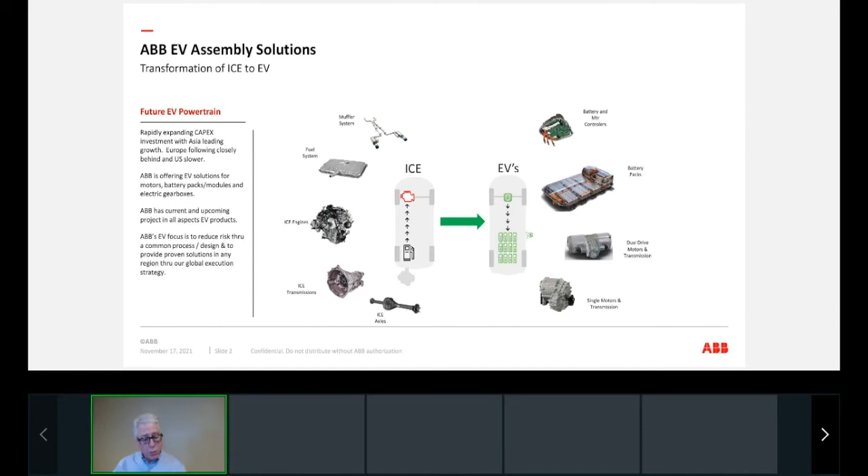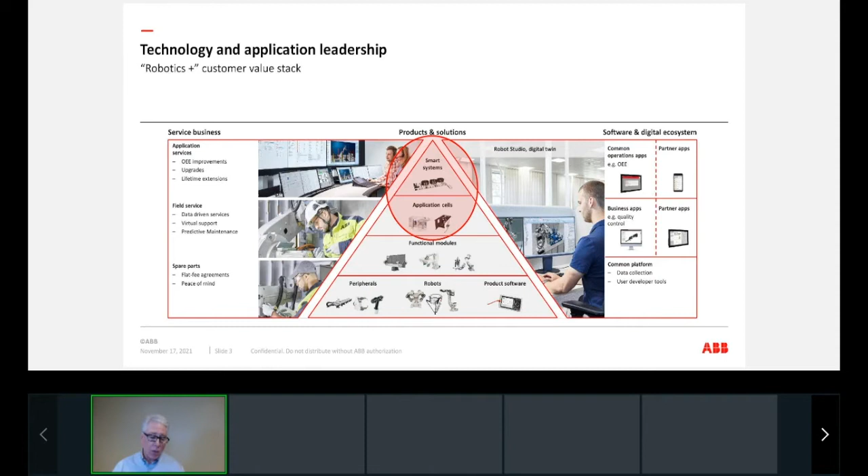If we step back and look at EVs, and what's the real basic building blocks of EVs, okay? So you have batteries, which are made up of a number of things, and you have drive units or electric motors and transmissions. Those are the two principal building blocks of an EV, or the major differences there. Now, there's other things out there for sure that are different, but these are the driving underlying differences.

So if we take batteries, typically at the very basic level, you have cells. They could be a cylindrical cell, a pouch type of cell, or a prismatic cell. Those are just the different cells that would go into building that battery. As we move to the left a little bit, you have the modules. They are typically built up of cells. They can be somewhere 15 to 25 or 30 prismatic cells, or as many as 600, 700, 1100 cylindrical cells or pouches, depending on the range, depending on the customer's configuration.

So the modules are really there to take the cells, put them in a package in a little bigger format, and then they would go into what we call module to pack, which is typically how it's been done to this point, where you really take those modules and start to place them together and really build the pack, the battery per se, for the electric vehicle. Sometimes those battery packs are in the configuration of the vehicle or what would fit in the vehicle. Some are single level, some are dual tiered. There are a whole myriad of different arrangements on how that battery pack looks.

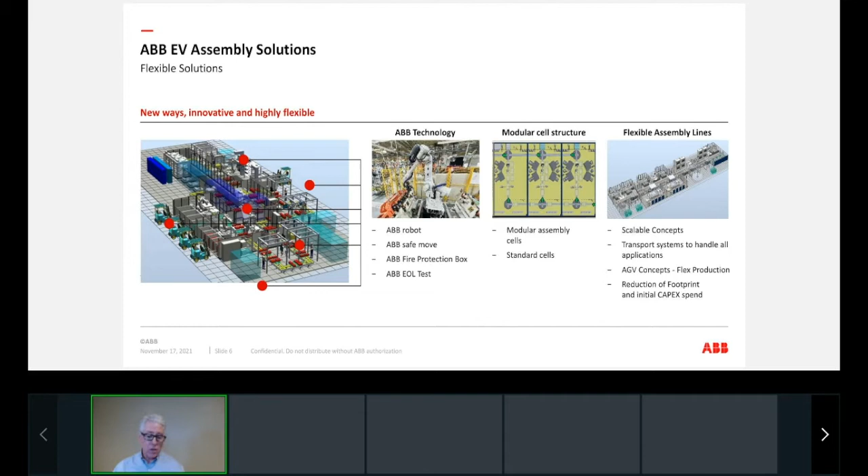We arrange them in a flexible assembly line that really can be scalable. It can use an AGV-based transport system. It can be conveyor-based, it can be robot-based, but they're standard flexible modular cells that are basically standalone entities that can really function together with those transport systems. So this is that highly flexible solution that we at ABB have really started to put into our systems.

If we expound on it a little bit, here's a typical battery assembly line. So what this system does is we take the input from the customer, we look at their product, we look at the requirements of their product, we then look at the volumes that they want to do, we look at the testing that needs to be done. And while every battery is pretty close, there are some minute differences between them. And what we do then is we say, okay, this would be the basic backbone or the framework of the system. And we would do it AGV based or conveyor based. But we build that.

And then what we do is we look at the left, we take standard stations. You'll see like a flow drill station for putting the covers on. You'll see a manual load station for wiring. And maybe you have 4 or 5 of those and you put those either in what we call parallel, which basically they're completely parallel, one next to the other, or they can be in series if it's required, or they can be what we call stitch parallel, which is basically you pass one through to the other. And we do that same thing on the rest of the modules that really build up this system.

So that's the key to building a flexible cellular-based modular assembly system. It's really taking those individual pieces and putting them together and connecting them with an AGV or conveyor-based transport system. And what really then drives that is its ability to scale up and down. And we'll talk more about that through some of the solutions that you'll see here in a few minutes.

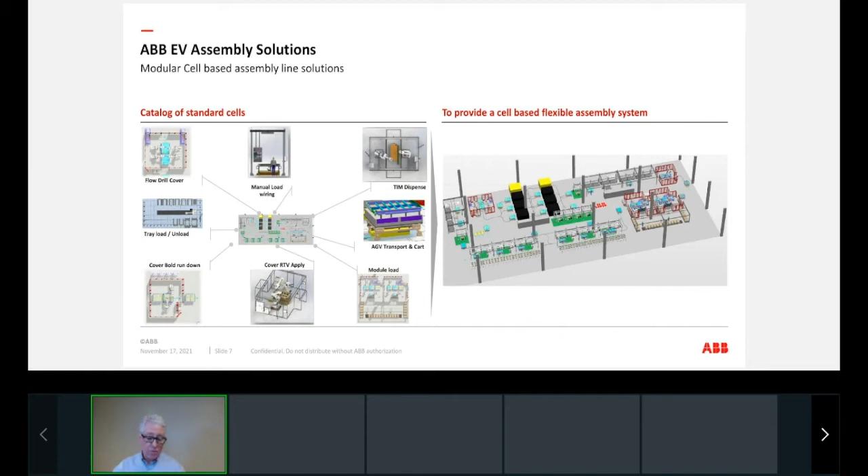So if we go back to that basic building blocks of what an EV is, what I wanted to do is share with you in each one of these areas what ABB is doing, and in some cases what we're not doing and why we're not doing it.

So if we take the battery and we look at the cell, you'll see the cell is typically high volume, meaning you're going to run 5, 10, maybe even more per second, depending on what they are to build the volumes of the future EVs, okay? If you imagine this, if you have 1,100 of these cylindrical cells in each module, and there's 12 modules in each vehicle, you can just imagine the amount of scale that you've got to do.

Also in the cells, we see some technology: the winding, the coating, the slitting, the whole electrolyte, the forming, charging, discharging of the cells. Those are all really traditional battery, even the old school cells that we use in our mice and anything that we use. Those are technologies that were born out of that industry, and there's people in that industry who know those particular equipment very well.

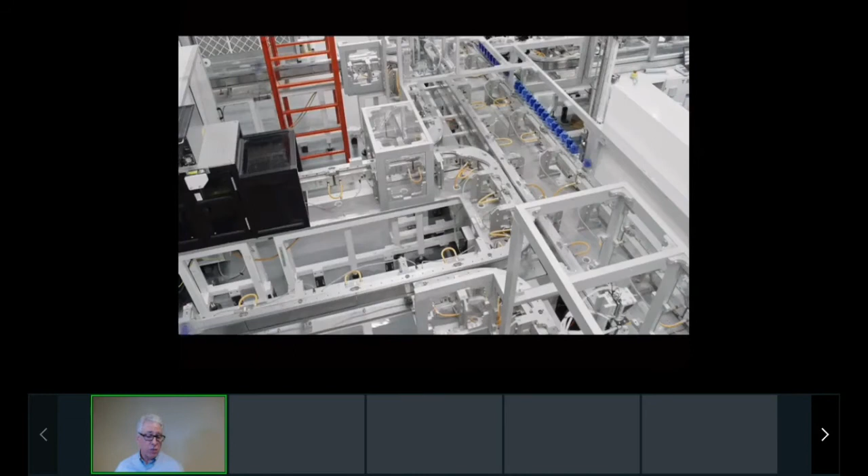I wanted to share with you a little video of that track. So here you see a battery cell moving through an ACOPOStrak configuration and assembly system. You'll see that this is very high speed. You can marry them all up. You can put small trains together. You can then break them apart. It's very, very flexible. And most important, it's high speed. That's the key in the cell manufacturing of EVs, high speed in the cell.

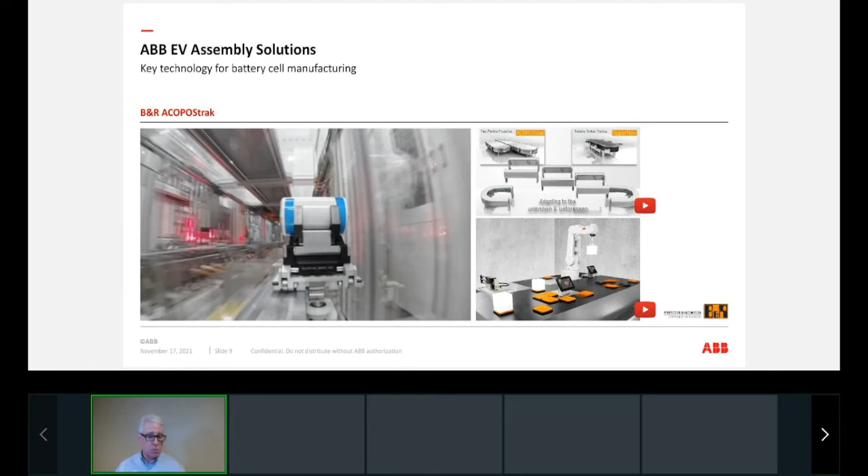So what is it we would do with that? Here's a solution based on the ACOPOStrak. It's using the ACOPOStrak to take cells that came out of formation. Formation is a process that each of the cells have to go through after they're put together and charged with an electrolyte. They go into massive storage facilities, typically temperature controlled and fireproofed, and stay in that storage sometimes more than 20 days, sometimes less. They get charged, discharged, and you're really forming that cell.

But the cells don't always form the same, okay? Some are better than others. What this system does is allow you to separate those cells. We know the grading that came out of formation because they've tracked that and they've given us a tray. We pick all those individual cells out of those trays by their grades, and then we use the ACOPOStrak to separate those and marry them up in smaller trays.

So now we can start to handle 10 or 12 of them simultaneously, and then move them onto the pack out cells at the very back. This could go from a cell manufacturer within a facility over to a module or cell to pack line, or it could be in a different facility and then be transported to various other automotives.

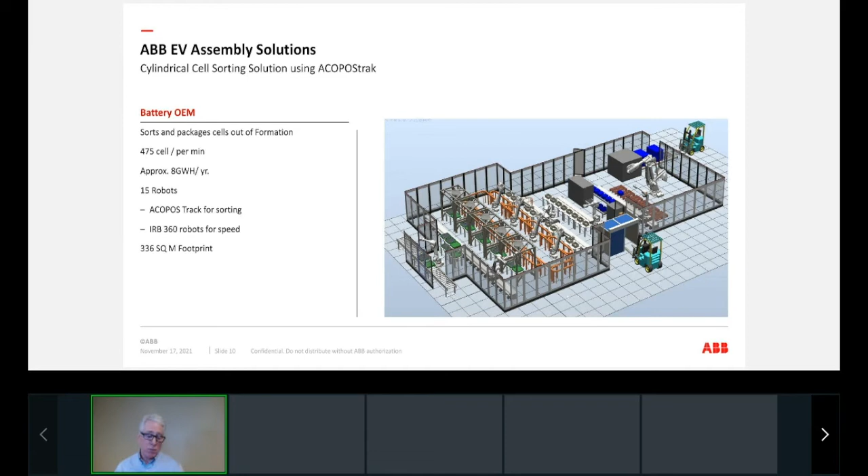If we move further now, we get into the modules, and modules are becoming more and more important. We're seeing a lot of our customers are very, very interested in cell to pack. And as you can imagine, if you're going to go from cells into modules, the same process has to go from cells into cell to pack. So the welding, the stacking, the thermal paste between the cells, they're all going to be similar. And that's why we're seeing a lot of renewed interest in how you build modules, not just receiving them from a battery manufacturer and then configuring them in the pack.

So as we jump into the module build a little bit, I wanted to show you what they consist of. What we're going to show you here is one particular prismatic battery. This is a module. It's for trains. And what you'll see is the modules here are stacked in certain orders. There's dividers, there's different separators between them. Sometimes there's computer boards for battery management that are placed into modules.

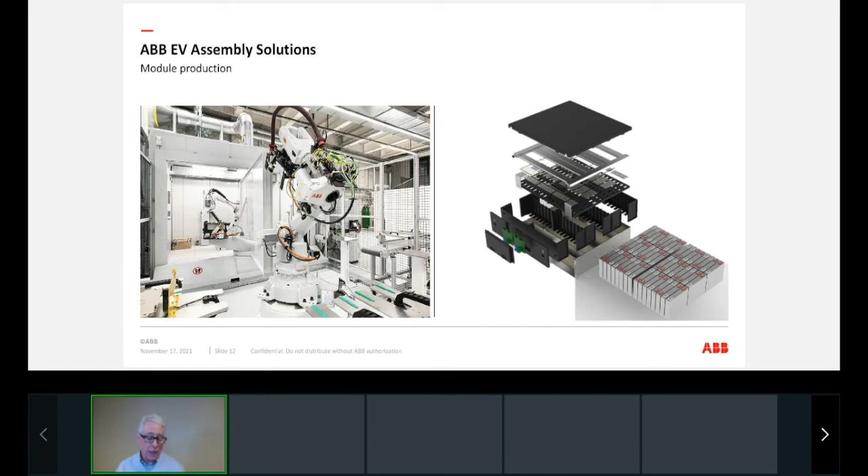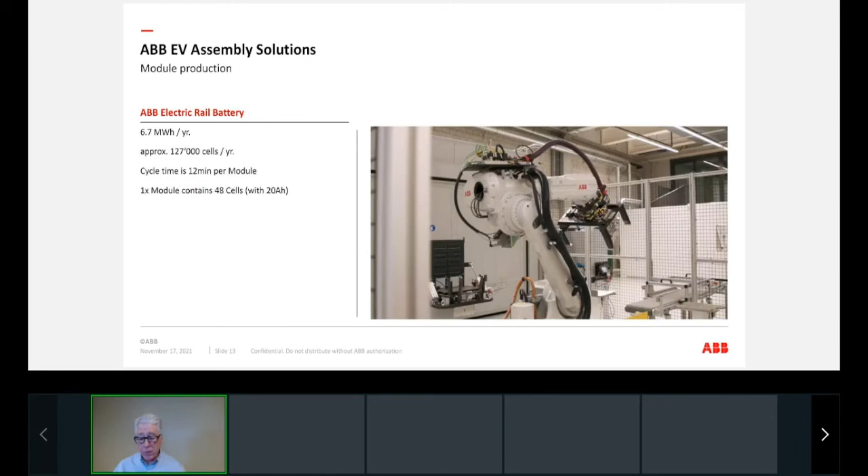But the largest single thing in most module production is the welding of the tabs. How do you connect the anodes and cathodes? That is principally the largest CapEx spend and usually the most machinery in each of the module assemblies. So what I wanted to share with you in this next video is what a typical module to pack would look like.

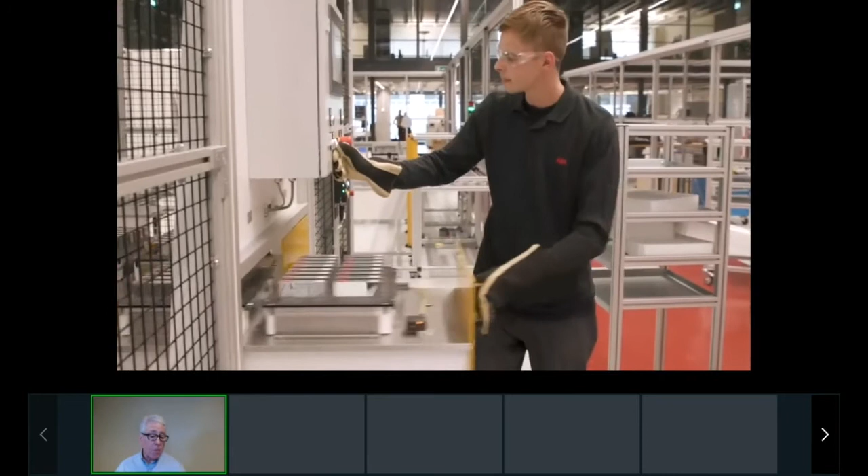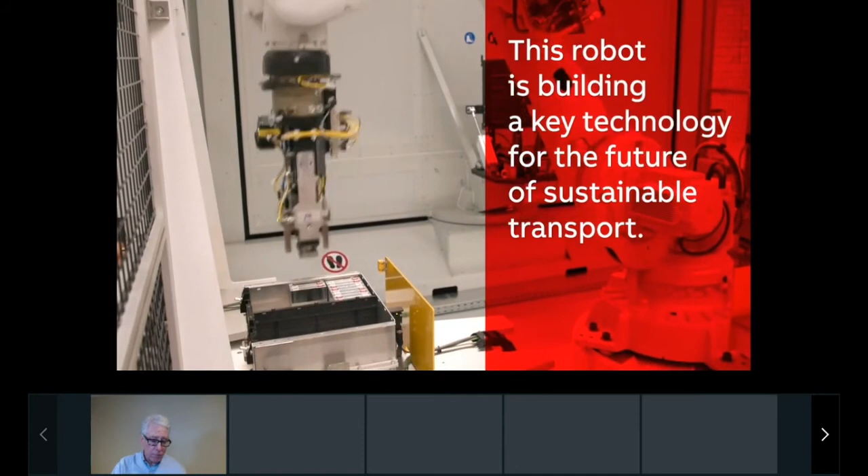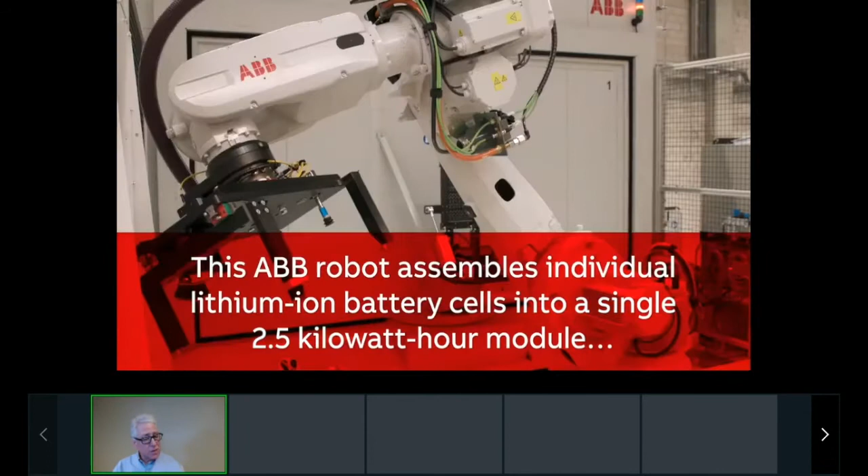So here, what you'll see is a typical cell. You'll see the modules coming in here. They're just in containers. So we pick them out with a robot. We then load them into a configuration. You can have multiple configurations. I think this particular cell has 3 or 4. And you'll see the red and the green or white tabs that are on the top. That's to get lined up for the bus bar connection when we weld.

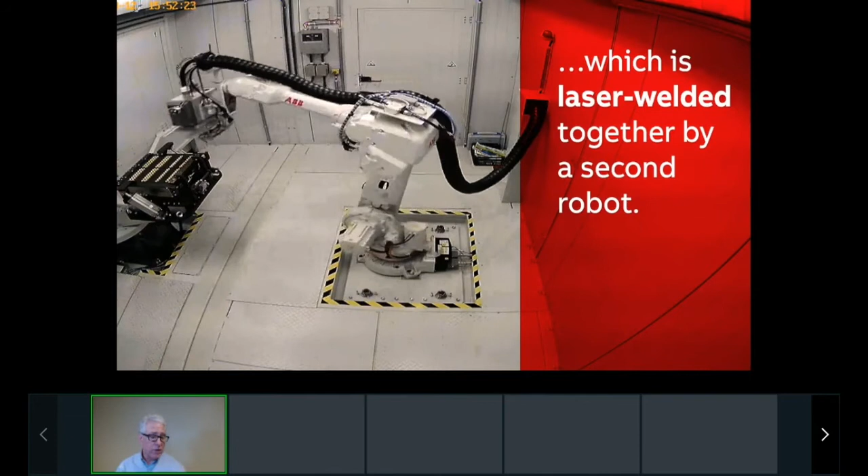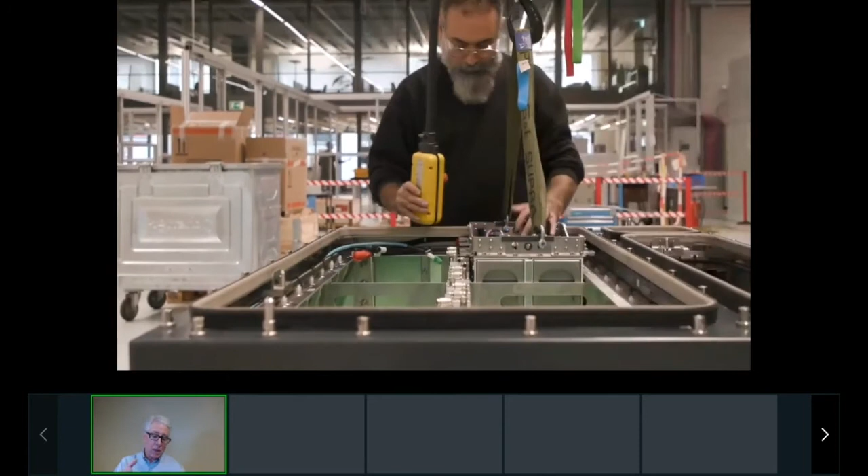We then load it to a traditional turntable, arc welding, laser welding style package that we have produced. That's one of our standard cells that our systems have built. And then after it's completely welded together, we then, in this case, manually build it into a battery pack. That's typically the whole pack building or module building process. This is a very limited piece of it, but it gives you a good insight into what module build is about.

As we move forward, I wanted to get into the pack build. And this is where a lot of our customers are focused right now. This really gives you the configuration of the vehicle. It sometimes is the whole floor of the vehicle. We're not going to talk cell to pack today, but you can imagine that cell to pack would basically be combining those things that we just saw into this same process.

So what you'd see is a much, much larger scale of equipment. You'd see a lot more of the welding. You'll see a lot more handling of the cells that would come in instead of just picking modules and placing them. So what I wanted to do next is talk about the major pieces in these battery packs. I get asked this a lot. What is a battery pack and what does it look like?

Well, battery packs are typically made up of trays, an aluminum or a steel base, that's been precisely machined and/or cast. And then you have a cooling plate, either integral or a cooling plate that is added in and bolted down. That cooling plate is meant to take the heat away from the module, or in a cell to pack, the cells.

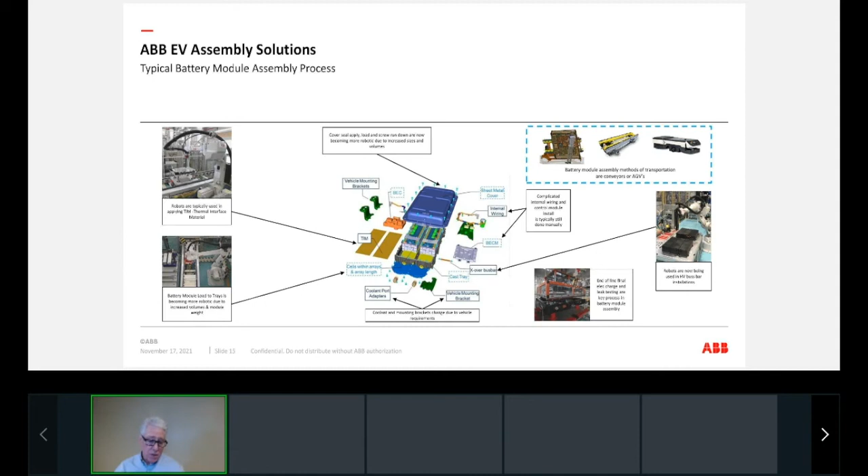And then far and away, the biggest piece of it is the charge discharge, really the end of line cycler testing, to bring that battery into its full charge. It's about 80% charge when it leaves typical assembly lines. So you charge it up and discharge it to make sure the battery is working well. And at that time, it's ready to go to vehicle assembly and be put in the vehicle. So these are the typical steps in a battery.

I want to take you now through a battery system that is modular. It's highly robust. It's got a lot of robots in it. It runs about 44,000 units a year. There are, I think, 8 robots in the system, and it's very much a typical battery assembly system. So as I bring on the video of this system, I would like to talk through that a little bit.

So what this system does is you see these 2 hi-lows down in the very center, very bottom of the picture. Those hi-lows are taking finished batteries out on the right-hand side, and they're putting battery trays in on the right-hand side. And we have one robot on a track loading these new battery trays onto the AGV e-cart, and then we have that same unit pulling finished batteries off, putting them in dunnage to leave the system. So as we continue to follow this line around and we go down to the cell on the very bottom right, that is module load.

You'll see the 2 high-lows that are bringing in product into the very left-hand side of the screen there. They're bringing in modules. Those are modules where you're picking those modules all out of those dunnage. There's 2 robots on track. It's using 3D compliant grippers to go in and pick those modules up. And what they do is then they pass those off to handoff tables.

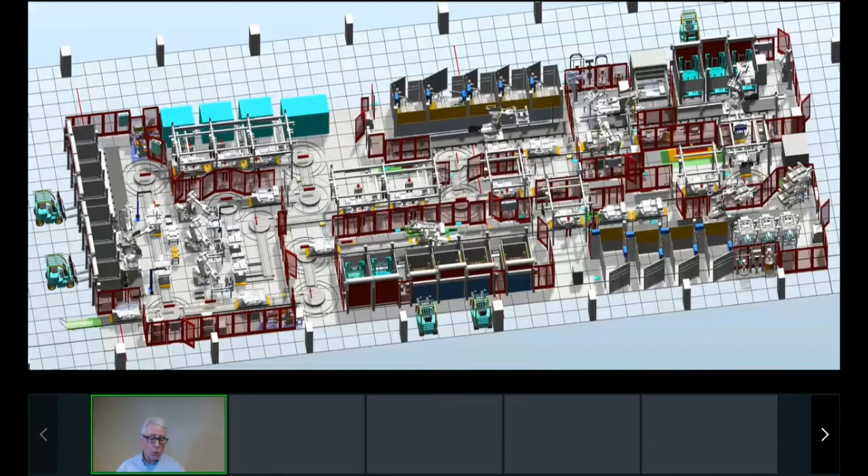This is where we hook the interconnection. So this is actually the cover where all the connections of the battery to the motor, the battery to the rest of the subsystems of the vehicle, that's where that bulkhead connector gets put on. It then comes to one of the final stations, which is basically the final end of line test. But before we do end of line, because this is a glue-on cover and it's not a gasket, we actually have to let that glue sit for a bit.

Okay, it's got to sit for time, or if we charged it with air and tried to find a leak, we'd just be blowing the seal out or making it worse. So what you have is a baker's racks where we hold those, and a robot basically keeps those filled. And when it's in there for the set amount of time, it comes into these end of line testers where we go in, hook the battery up, charge it, discharge it, verify it, do all of the cycle testing on it.

And then it leaves and comes to the pack out area where we actually then put it in dunnage and it's ready to go to the automotive final trim and assembly building. So this is a very, very typical battery assembly line that we have built.

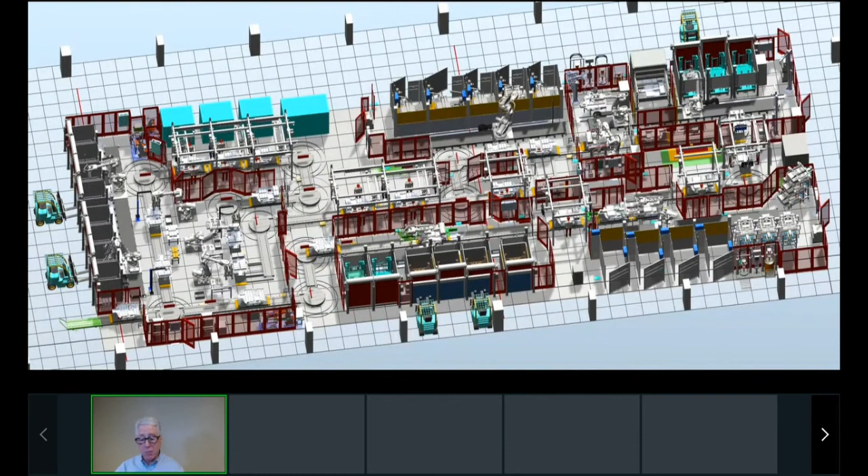As I move forward, I want to get into battery control modules. Battery control modules are really important. They basically give the drive unit its controls, how to act, how to do the regen, all those pieces of that. And what you'll see here is a typical battery control module.

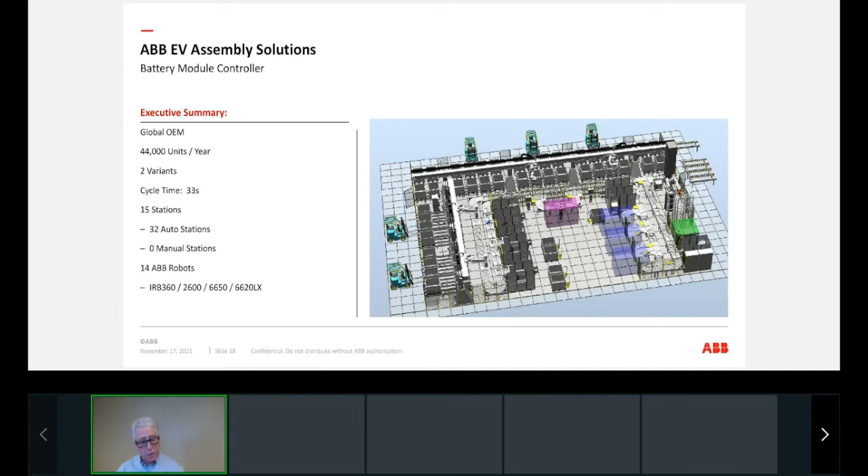Again, a lot of use of the IRB 360s and a lot of loading of product in. These cells have a lot of product that comes into them, and we use the flex picker and then traditional assembly processes to put these battery control modules together.

So what I'd like to show you here is a standard cell we built. You'll see the IRB flex picker. He's loading parts out of trays, putting them onto a pallet, which contains the part, and then it moves down to the next station, which is a robot that would either do more work on it or it could be doing the fasteners.

So these are kind of standard building block segments that you could put together. If you have a lot of these, you can put 4 or 5 of these together, have different incoming product, and then around a conveyor system or an AGV system, you can use this as a building block. What I'd like to show you real quick is a quick video of what those look like. And that is right here.

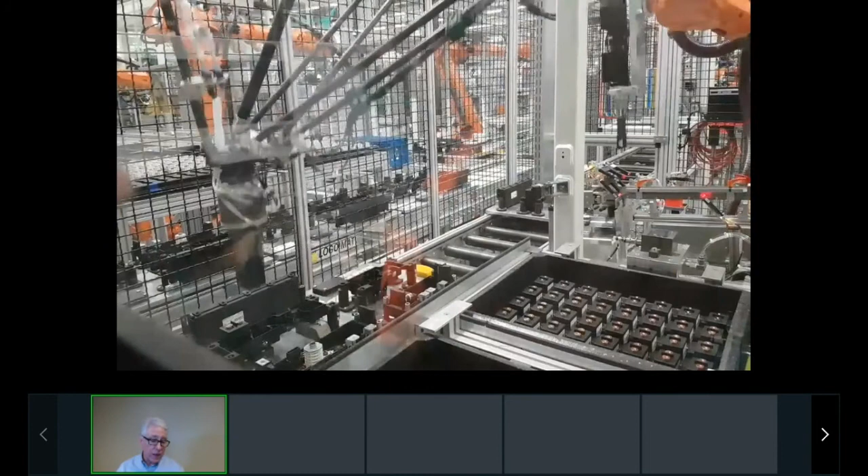So this is a standard cell. You'll see the IRB flex picker robot. It's picking up the parts out of the tray. It's reading barcodes, so it's understanding what it's getting. And it's also writing to the pallet tag exactly what it's got.

And then you'll see it leave and go to the next station, which is basically screwing on those pieces that we just added on. There are other applications after this where we would maybe roll on insulating film between them or do some assembly in that station. But this is a pretty typical station for us in battery control module build.

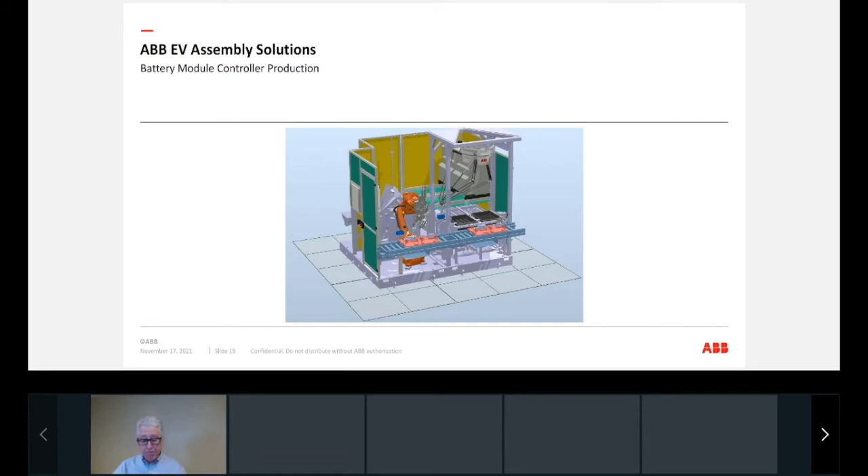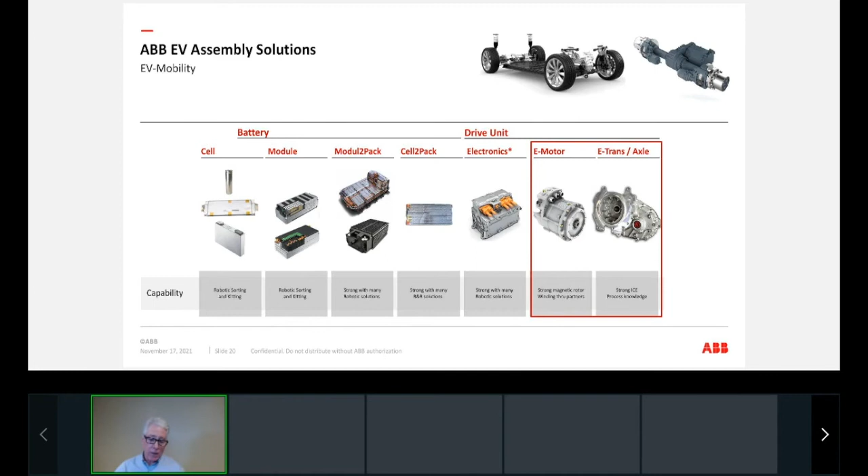As we continue on further in our journey through EVs, let's talk about e-motors. This is probably the biggest area that we're going to get into. E-motors are basically made up of 4 or 5 different parts. You have the wound rotor or a magnetic rotor, one or the other, and it typically depends on the product design of the customer. You then have in the center the EV engine. Again, they could look like a servo motor or like a gas engine; it really is dependent on the customer's product design.

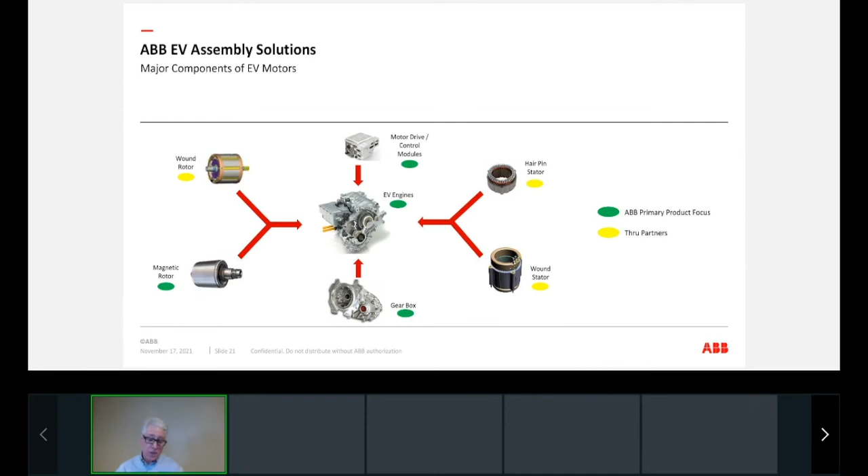So let's get into motors. Let's look at a magnetic rotor. You saw that I said we really want to do magnetic rotors. What we see here is a magnetic rotor. They're typically made up of different slices, and there's magnets put into each one of those. What you see here is a small video of this, and I will bring that up right now.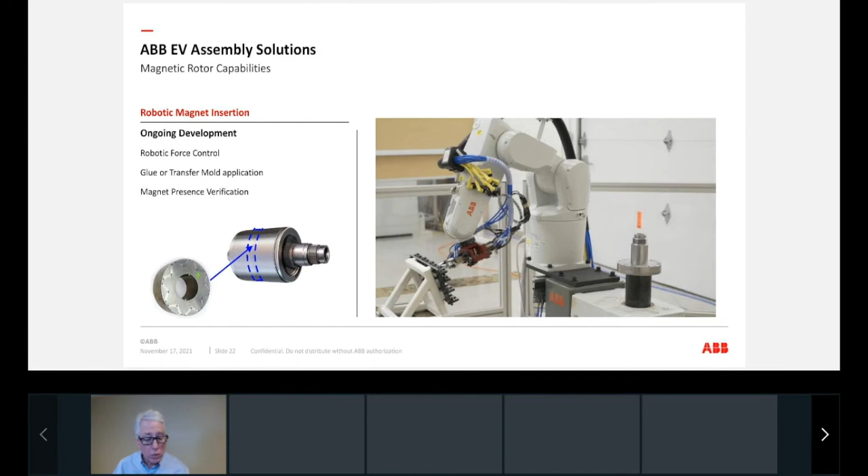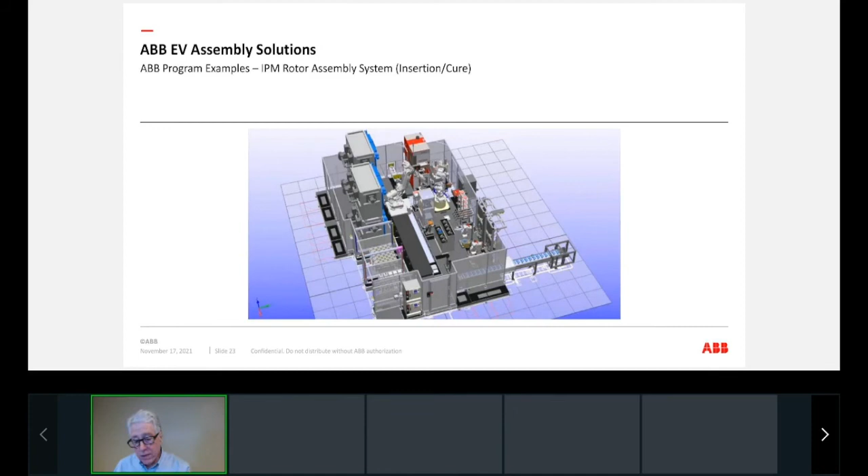If we move back and continue forward, this is a typical magnetic rotor assembly system, and this is building up those stacks. So I'll bring this up and you can watch it play here.

So this is a typical magnetic rotor. You'll see the two small robots down in the lower right-hand corner. They're loading magnets, and they are just all day loading magnets. In this particular system, they use force control to load those magnets. They're on a turntable, again, a highly flexible solution.

You'll see the large robot in the center. He's basically grabbing stacks from the incoming conveyor down on the lower right. He then loads them to the magnetic stackers, and then he will also take them and stick them in these big blue-doored items, which you see on the top left-hand corner. And those are ovens.

We actually heat this part very hot, and after it's heated and it's hot for so long, we take it out of those ovens and we go into a process which we call transfer mold. It's a lot like injection molding. What we do is take a pellet of material that's been preheated. We put it into a servo-driven injection mold.

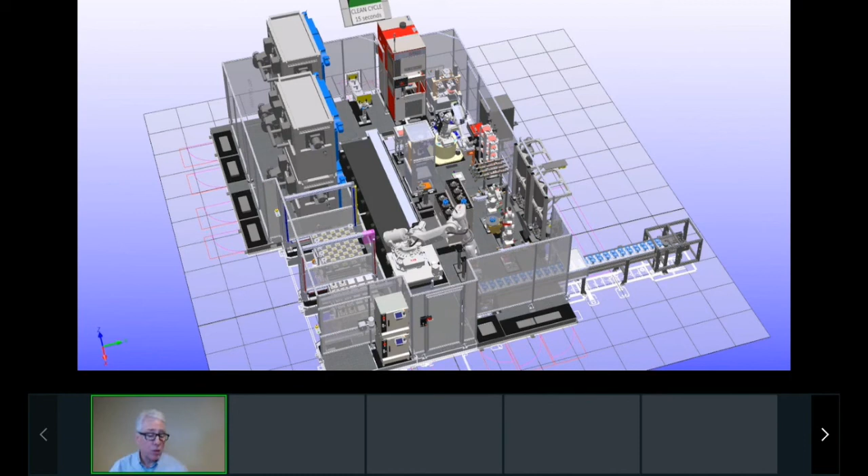We put a runner plate on top and bottom, and we compress that under very high load into that very hot part. That hot part then sets that glue, and it completely encapsulates all those magnets in all those different cavities. And that way it's completely secured inside there. We then take the plates off, and then we load this out, and we've built a magnetic rotor stack.

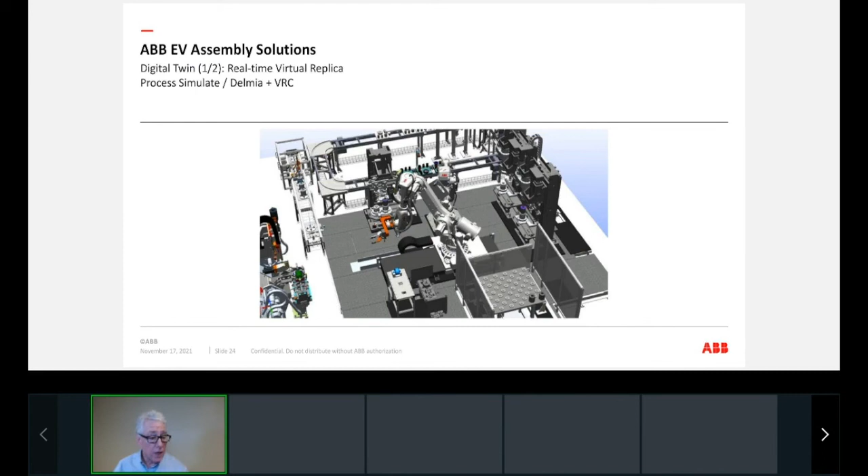If we continue further, we then look at the next typical rotor cell, and this would be for either a wound rotor or a magnetic rotor. What you'll see here is a cell that we've done in a digital twin, in Process Simulate. And what you'll see here is a system that really is using two robots in conjunction.

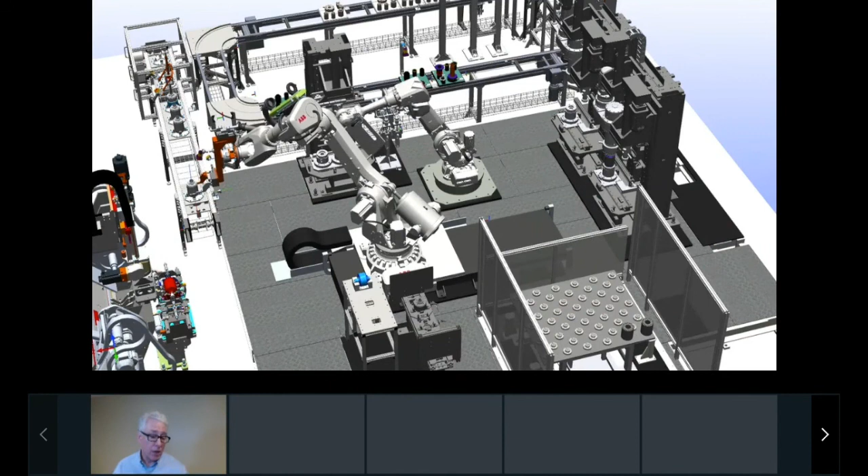You'll see the large robot is picking a part out of a balancing machine. So it's balanced, it's putting another part in it, and then it will load it on the outgoing conveyor. But the small robot, you'll see pallets running around. That's a kit line, and those pallets are just bringing the parts to these two robots that work in conjunction, in tandem.

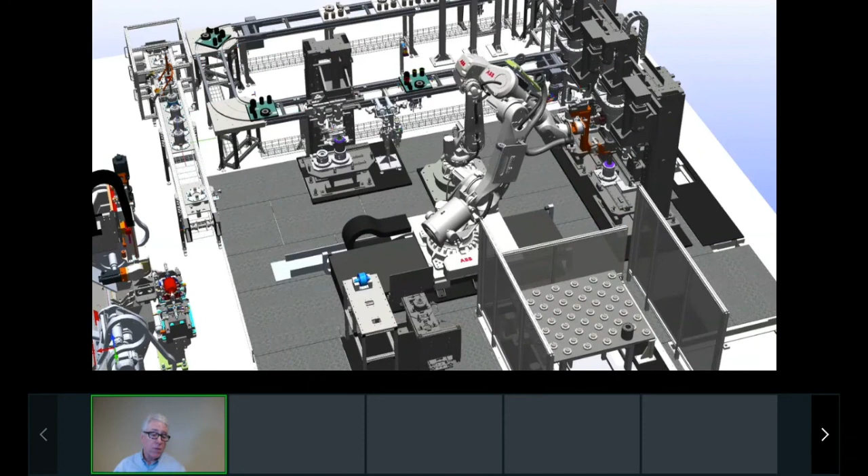And what you'll see is rotor stacks. You'll see the small robot just put a shaft into it. This could be a press station. It could be a bolt-on station. It can be either one of those. And then you'll see another cell over in the middle, much closer, where the small robot just loaded a part to. And you'll see that that's where we add bearings on, we add an exciter ring on.

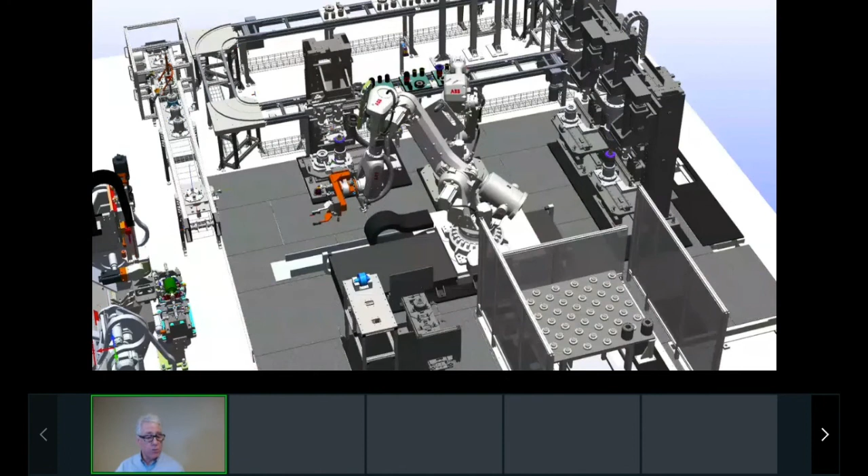And what this whole process does is it finishes the build of a magnetic, or in some cases, a wound rotor, puts the shaft in, puts all the right pieces to get it to go to the final engine assembly line. And the final engine assembly line is what we're going to talk about next.

So in a final assembly line, the key to these stations is really marrying the stator and the rotor. Typically you have housings, you put the stator into the housing, you then build some pieces around it, whether it's a small water pump or an oil pump for the gearbox. It certainly has a bunch of different connection points for the cabling that has to charge it. It could have the battery or motor control box mounted to it.

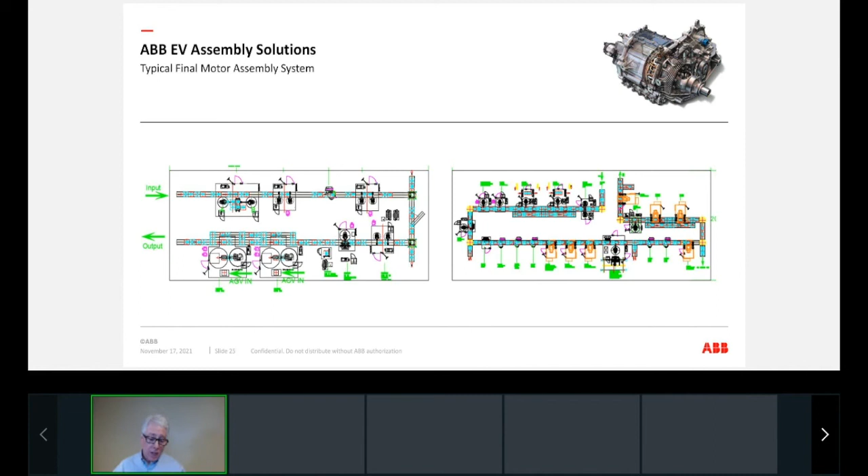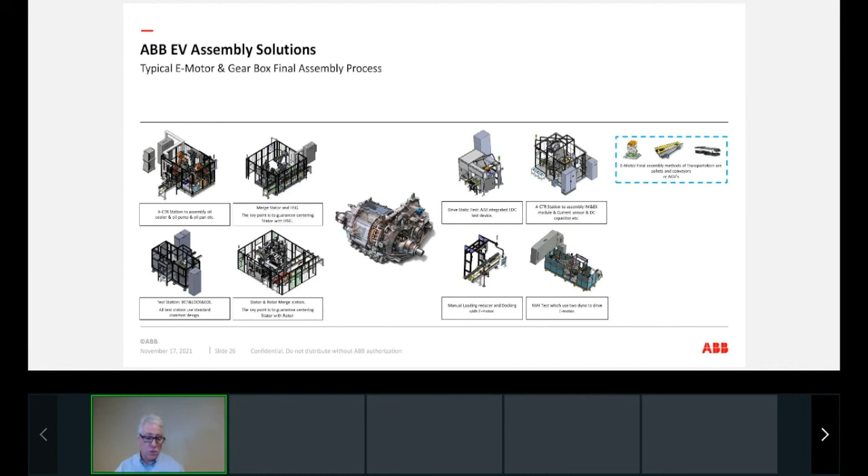What I want to share with you is, again, around that whole building block structure. We really push and build the building blocks for the structure, and that's what you'll see here. These are our standard building blocks.

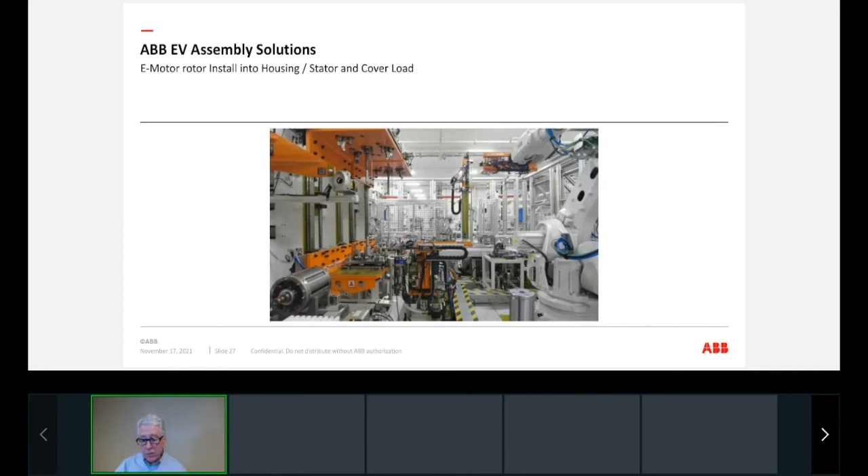I want to move very quickly on to one of the last videos I have for you. And this particular video is that rotor marriage stator. And here what it's doing is you'll see a robot, again, modular assembly cell. You'll see it picking a part off the assembly system over on the very back. It's loading a bolt into the case here. It loads the case into the tooling.

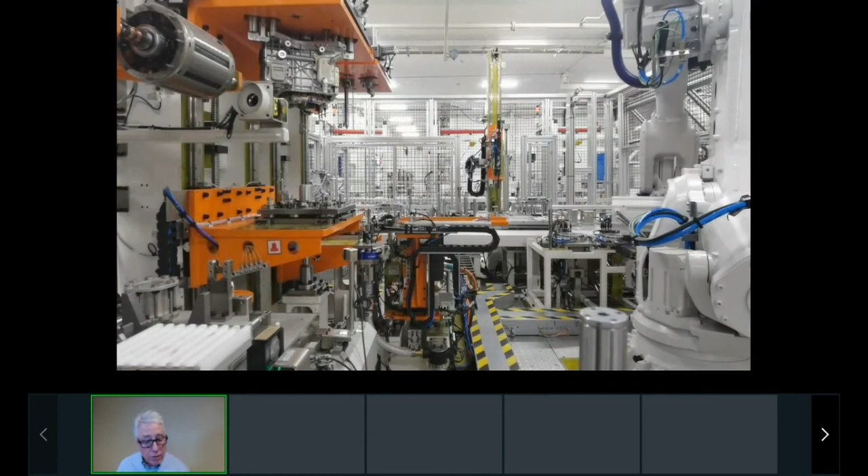It will then go and switch its end effector. It'll pick up the bottom cover, because we have to put the bottom cover on this one, and bearings. So you'll see it's changing its end effector right now. It will go and grab the bottom cover off the pallet of the main line. Okay, and you'll notice this is all offline. This is not in the line. Okay, we then load the end cover into the tooling.

We'll then go and change the gripper again, and we'll then pick up the rotor and put it into the tooling, and then we'll together bring all three of those parts simultaneously together. And this is one of the key stations in the assembly of electric motors, is how do you bring those really three key pieces together. So here it's putting them. We hold the rotor in centers.

Okay, and then what you'll see next is it will go bring all three together. The robot is changing its end effector now, and it will get ready to take the final part that's been completely assembled and put it back onto the main line.

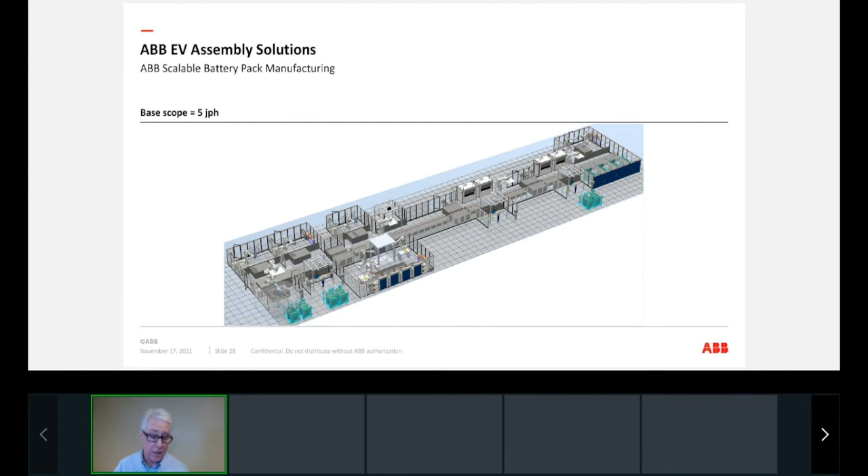And vice versa. If the assembly line in a couple of years needs to reduce its volume, our customer could take that asset and remove it and take it to another plant or another system. This is the advantage of flexible modular assembly lines.

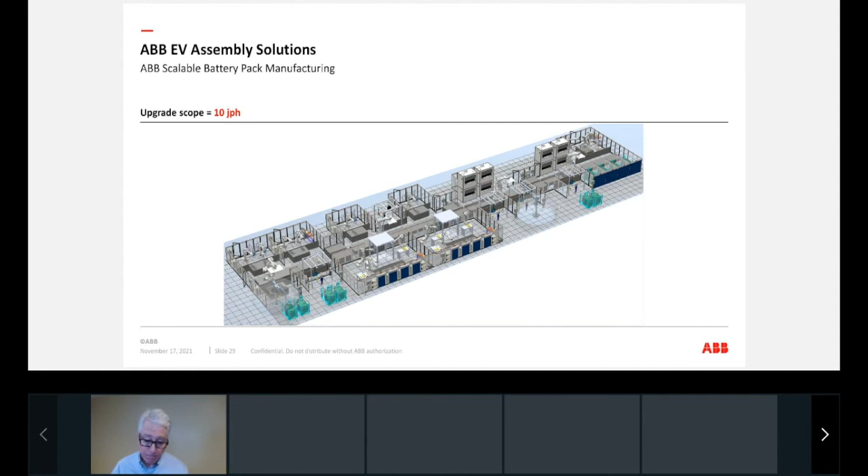Last but not least, I want to kind of go through the robots in assembly. You saw many robots. You saw many of our solutions. We have integrated dispense packages. We have the ABB Flex Cycler, end-of-line tester. We have our track systems, ABB conveyor, our ACOPOS track. We have that transfer mold process, what you see. And most importantly, now we have AGVs.

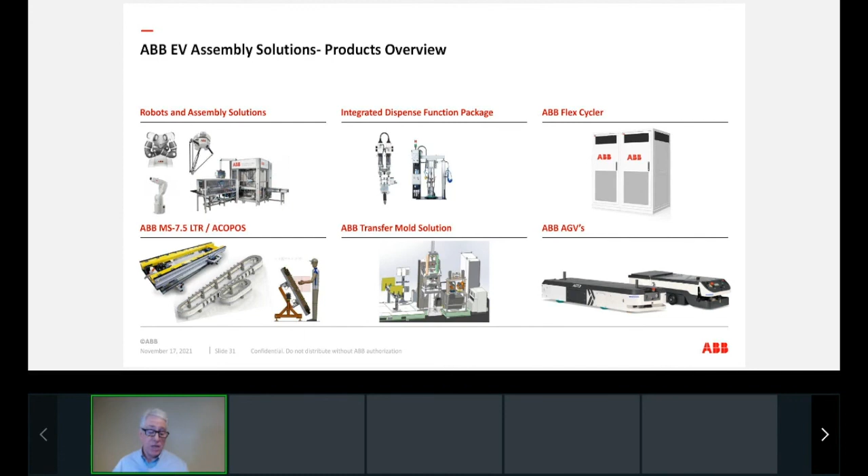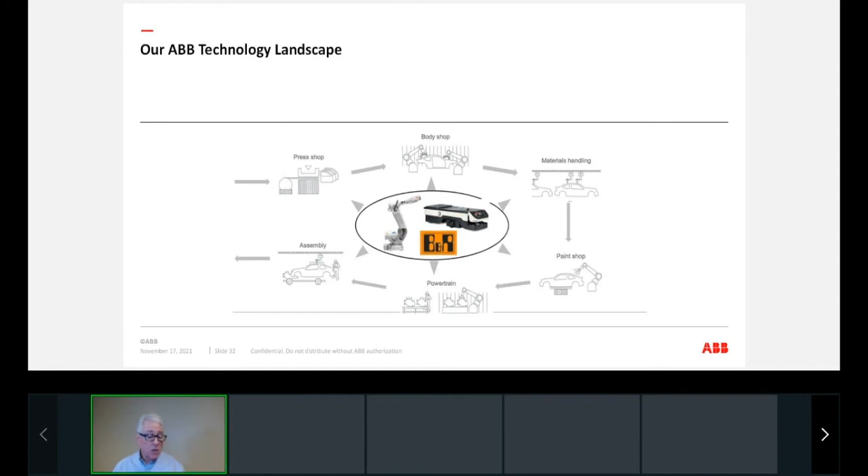So if I finish up, what you'll see here is the whole technology landscape. We go from press shop to body shop, material handling, paint shop, powertrain, and final assembly. That's the whole life cycle of a vehicle. You'll see the robots, and we package that all around our standard products, robots, B&R, and our ACOPOS conveyors, our AGVs. So with that, I'd like to say thank you and open it up for any questions.

So, any questions? Looks like we have nothing yet. Any questions at all, guys? Oh, I think we have a question.

What do you see as the biggest challenge facing EV solutions? Oh, great question. It's probably how do you scale? How do you have that flexibility? Our products are changing. Our volumes are changing. It's really easy to build these things a couple at a time. But now we've got to build 300 or 400 of them at the same time. How do we change that? How do we scale it? And how do we really make that scalable so we're future-proof in our business?

Another one: is ABB supplying all the stations that you showed in the videos, or are they from integrators? Most all of those stations you saw in these videos are ABB stations. In fact, I think every one of them were.